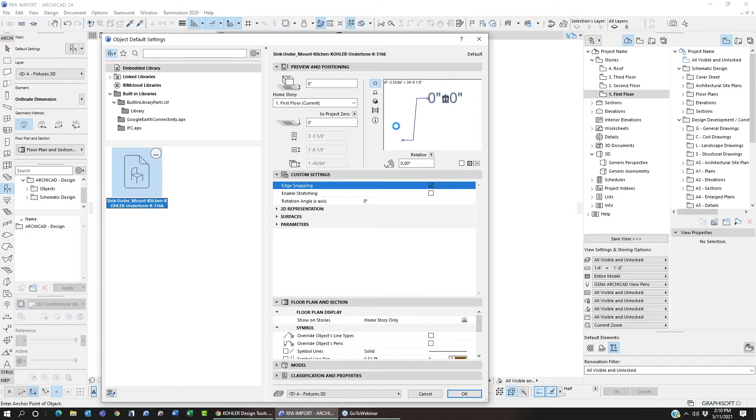And there it is. So it's just said that it's been created and it's been added to the embedded library. I'll hit OK on that. Go to the object, double click on this, and you'll see here under embedded library that that part has been put into the library there, and it's got quite a few polygons here, but I'll just show it in 3D.

That's it. And it's got some information in here as well, some parameters that come through with it. We can kind of use this, and it has a few other settings in here which we can turn on or off, edge snapping, stretching, things like that. But I'll just hit OK, and I'll place it in here. And it'll come in.

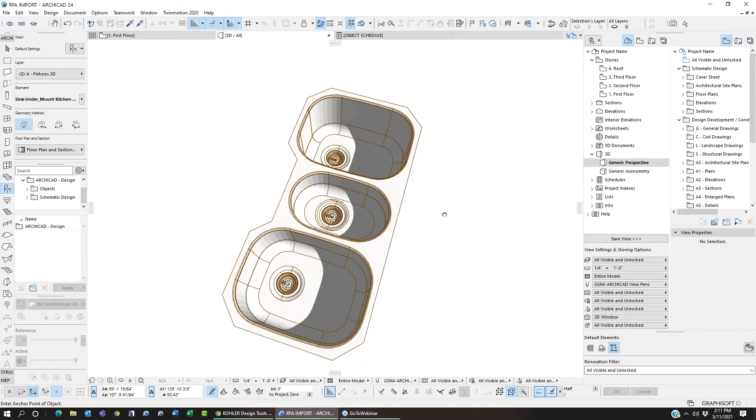There it is. Yeah, so if we just take a look at this in 3D, show all in 3D. You can see there that this was just the medium quality, so it's not completely... it's a little segmented, but I think you'll find that it will still render quite nicely.

I'll just render it quickly here. Render. So it'll show up pretty well here in a full render. The curves, the segments, are pretty unnoticeable, and the quality is really pretty good.

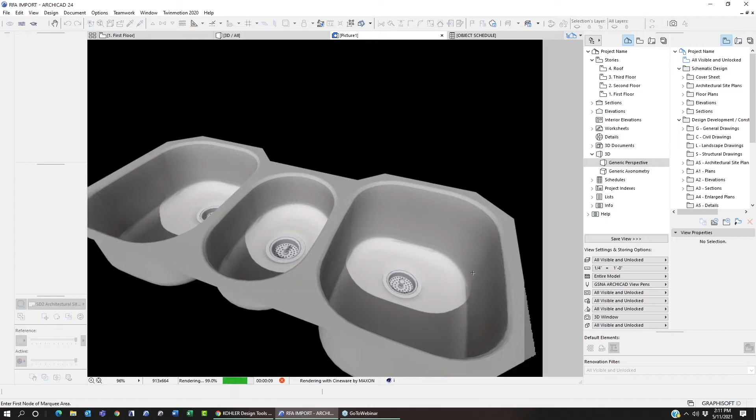And also I've got a schedule here, and this just will list out some of that information, those parameters that were available for listing. So you can pull this information out into either a schedule or into labels. So all that comes through as well. So that's as easy as it is.

You just got to make sure that these RFA objects are not too old. I think we can go back as far as like 2011 up to 2020, I believe, is the latest one that we have. So if you're having trouble with it, it's probably because it's a really old RFA object. But if it's reasonably new, then it should work just fine.

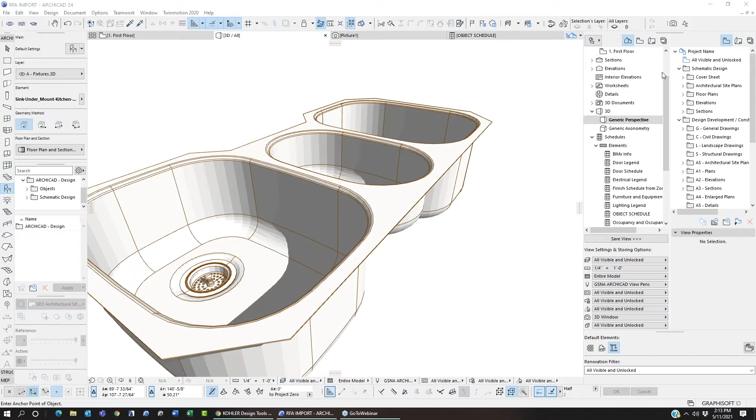Tom, I just switched over to you. Let me know if you're all set. I've got it, thank you very much. Perfect, so let me just go ahead. You can't hear me? Can anybody hear me? We can hear you. Okay, so everybody can hear me. All right, thank you. Okay, so let me go ahead and show—sorry about this, guys, looks like it's showing on the wrong screen. So I'll go to the main screen.

Okay, let me just go ahead and take you through this. My name is Tom Simmons, I'm with ArchVista, and I'm going to take you through Modelport. Modelport is an application that we developed with some developers, and I'm going to take you through how it expands some of the import options, offers interactive preview, cleanup graphics, edit import objects, and improves performance.

So let's first start about expanding the import options. Many of you talked about bringing in SketchUp files, Revit files. There's a lot of file formats out there, and one of the reasons why this was developed was that a lot of people want to bring in additional objects beyond SketchUp and Revit, and also be able to manage those objects in terms of graphics, performance for polygon counts, file size, etc.

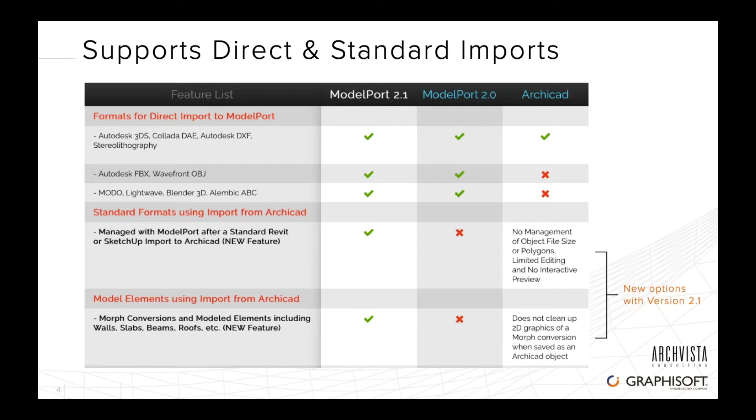So we developed it for that purpose, and we just recently added, as was released just the last couple of weeks, additional formats so that we can now import formats like: you bring in a Revit object or SketchUp object through the standard method you would in Archicad, and now you can bring that into Modelport to use the editing features and management features there. You can also likewise bring in morphs and other things that I'll talk about in a second. Let's talk about the direct import first, okay?

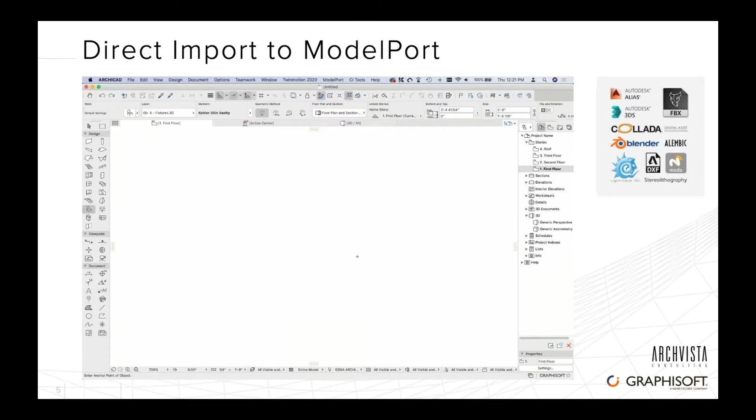If we're going to use Modelport to import, let's say, a 3D model using the DAE format—now the DAE format, if you're not familiar with it, is a standard format in the SketchUp 3D warehouse. So you can either download SketchUp formats or the DAE, it's a Collada DAE format. You can see it brings it in pretty cleanly using Modelport in that format. But if we use the standard SketchUp format from the 3D warehouse, it's going to come in, and this is going to look very typical of what you would probably see with any object you're bringing in from SketchUp or any other format that has curves to it.

And that's that you're going to see this sort of triangulation in the object, both in 2D and 3D, and it can get really messy. And that's part of what we tried to do with Archicad with Modelport, is to try to clean up some of those graphics.

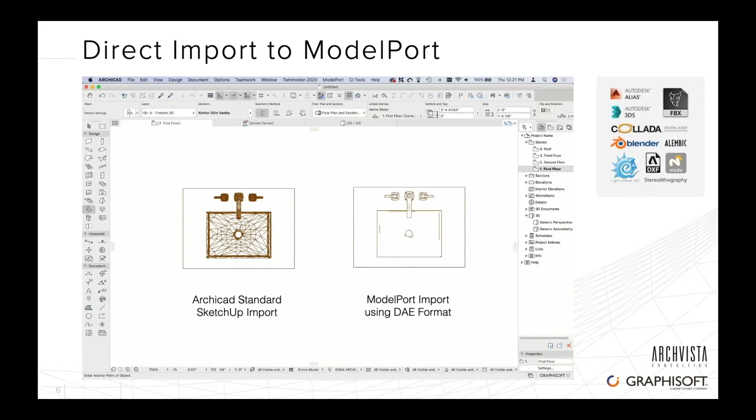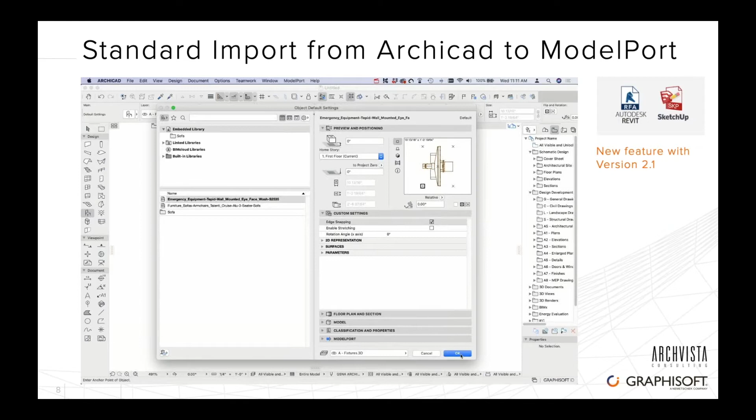We also recently allowed you to be able to import an RFA or a SketchUp file using the standard Archicad process. Now, why would you want to do that? Well, first off, let's say you have a Revit object, and it comes in, and it's great, brings in all the stuff, except that there's something wrong with it. Perhaps it's rotated in the wrong direction, perhaps there was something—people leave things on that you can't turn off, various reasons why.

And so you could explode that into a morph and edit it like that. Or with Archicad, with Modelport now, you can also just import it directly into Modelport and begin to use Modelport's feature set to change, in this case, its rotation. But you could also use it for editing the graphics, as I'm going to show you in a second, and some other options as well.

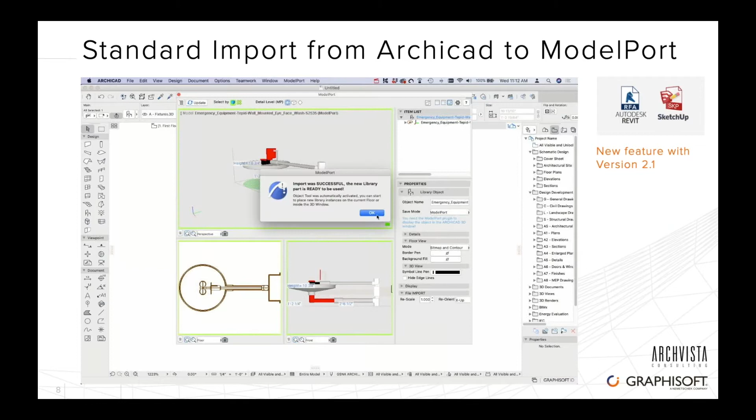So here we've imported it to Modelport, and we'll just basically delete that Revit one that we brought in, and place the one now in Modelport. There you go.

So let me now flip into talking a little bit about the management and editing capabilities of Modelport and why this is important. So many times when you bring in objects, and they can be from various sources, the ones that we mentioned in the poll and many others out there, you'll have objects that have high polygon counts and are large files. This is a great example.

This is the Viking website. This is their option to download a Viking object, and these are massive files that were created, as far as I can tell, from Rhino, and then ported out of Rhino into various formats for SketchUp, Revit, 3ds Max, etc. When you try to bring them into Archicad, they're huge. This is a 177,000 polygon oven, 45 megabyte oven, and this is one of the smaller files. Some of them were just really difficult to handle.

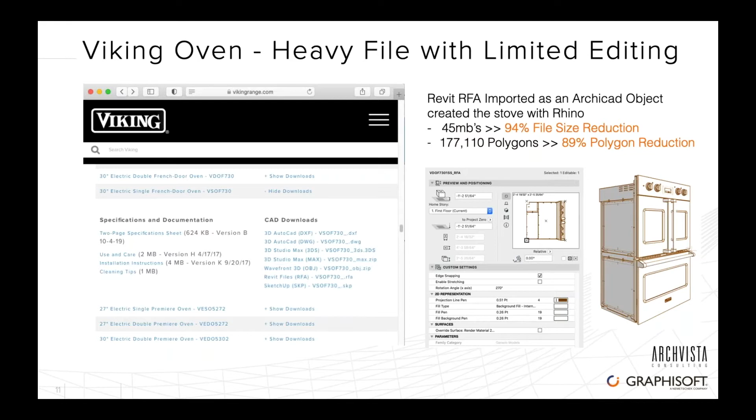So what can you do with that? Well, that's what I'm going to show you. You can actually use Modelport to reduce the file size and reduce the polygon count. I'm going to talk about this process. So let's take a first look at what you could do.

You could bring an object like this in and convert it to a morph. You know that when you convert it to a morph, sometimes it will have a massive amount of information also, because the morph becomes, as this warning is telling us, it can increase or decrease the performance of your project. So here's how you can handle that.

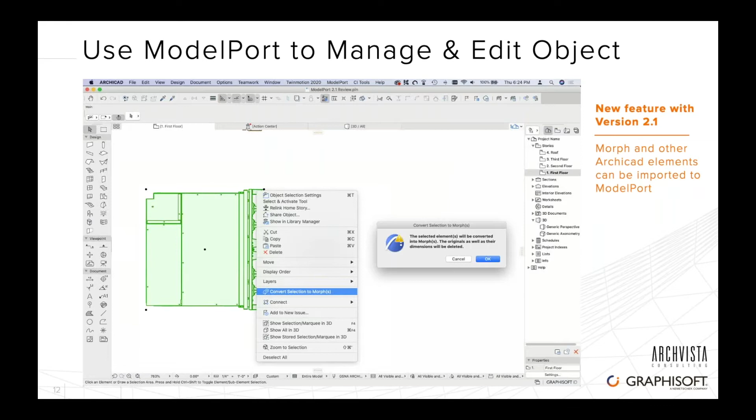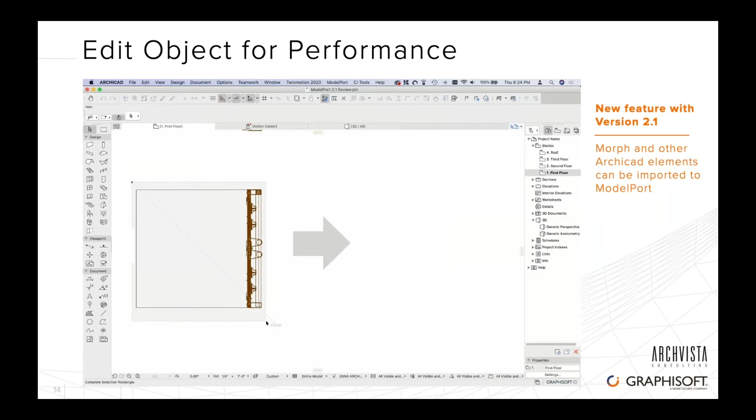This is a good example. We brought this in and converted it to a morph. So to help start simplifying and increasing the performance of this object, I'm going to decrease the back side of it. I don't need that, so I'm just going to delete that. I'm going to draw a slab as a representation for the back part of that oven. Just by doing that, I've already decreased this by about 60 to 65% in size.

I'm going to import that now into Modelport, and you're going to see once it comes in that rather than being 177,000 polygons, it is now 58,000 polygons.

So, good first step. Next thing we're going to do is this object, when it came in from Revit and from Viking, really didn't have any colors to it. So we're going to start adding colors, start adding materials, start to add some graphics to this and edit the graphics as well. And then we can zoom in.

This is an interactive preview, so we can click on any surfaces, any elements in here, and begin to edit those. So here we're going to actually go ahead and change these handles to a darker metal, maybe black. And again, start to build this up, right?

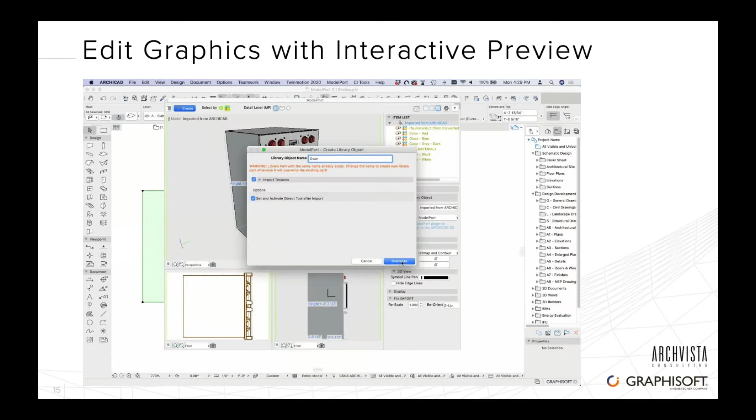So now I'm going to go ahead and create this object. I've taken this morph, a Revit object, converted it to a morph, and now I'm going to make it into a Modelport object from this point forward. Once this is done and this object has been created, I can close this and go back to Archicad.

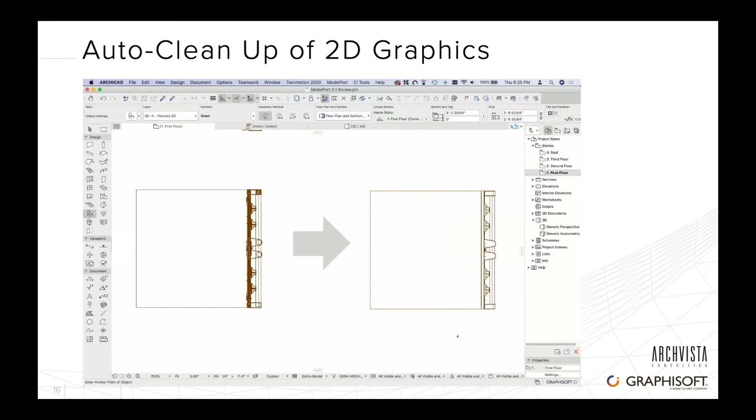And now at this point, we're going to go and place the object, and notice how much it's cleaned up too. After taking that morph, bringing it into Modelport, just like we did earlier with the SketchUp object using the DAE format, it's cleaned up the graphics in 2D and 3D. So next we want to reduce the polygon count.

Another new feature that's been added, because we can now bring in morphs and other elements, is we can select all the meshes at once versus having to select each individual one. So if I want to reduce the polygon count, I select all meshes, then deselect some surfaces by holding down Shift, so when we reduce polygon count it doesn't create triangulation on those surfaces. I'll select poly reduce under the detail full panel.

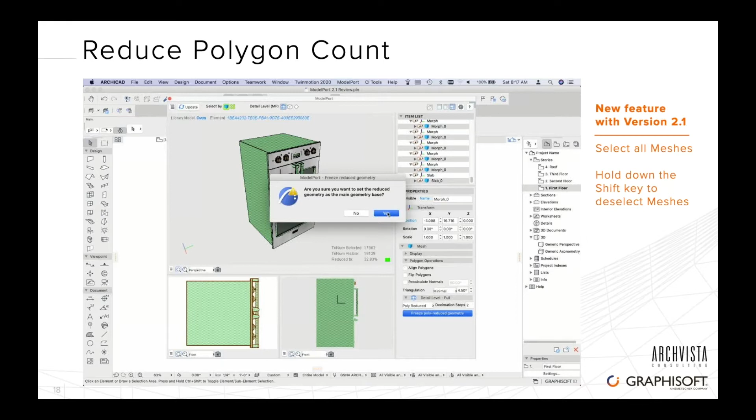Then I'll change the decimation steps. You can see this has reduced it down to 19,000 polygons from 177,000 - a huge difference. I can take it further down to 14, but I don't need to go that far - you start to see some triangulation there, so I'll take it back up to 2, the default. Then I'll freeze the poly reduce, updating this object, and finally update the object itself, and we're ready to go.

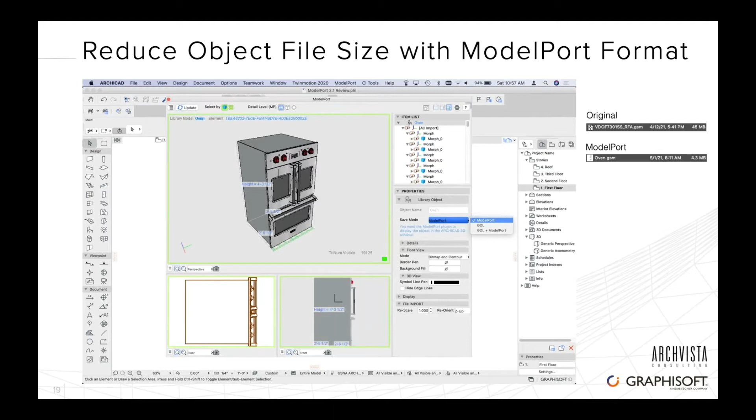Next, I also want to reduce the file size. This is a pretty big object - as a single object it was 45 megabytes. When it comes into ModelPort, we have the option to set the save mode to ModelPort versus the default GDL format. Just by doing that, we're reducing it from that 45 megabytes down to 4.3 megabytes in the final file. Huge difference between the two.

We can also control line weights, colors, and fill backgrounds with these objects when we bring them in. When I brought this morph in originally, it's in true line weight mode right now. But when we go into ModelPort, we can change our preview to show the plan view on top, and now I can select the areas I want to change.

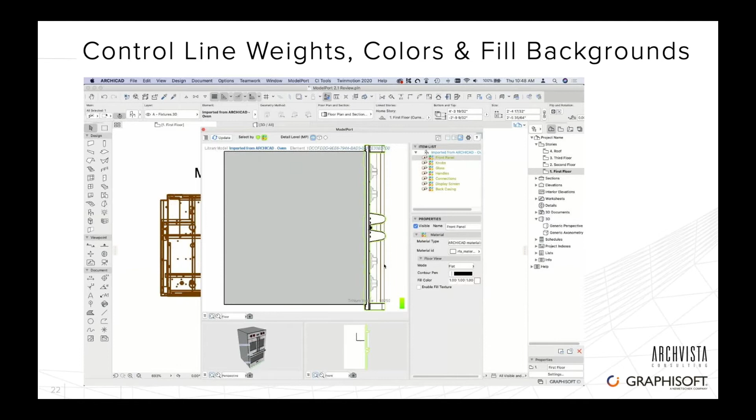Maybe I want to change the casing in the back to have some gray fill background. Maybe I want the line weight of the stoves to have a heavier edge around that casing and areas up top that are closer to you. Maybe I want to gray out some of the areas below so those fade away. I have control over the different materials that are part of this, and by updating this now, I'll see a gradation of the different line weights within this object, giving a much better look and feel.

So the final result here gives more options for importing different objects. With this ability to bring in morphs, add additional slabs to replace things, improve performance, and even alter those objects, I can take something like this and reduce it 94% in file size, 89% in polygons, clean up the 2D and 3D, edit the object, pen customization, material texture editing, etc. So you can see the results.

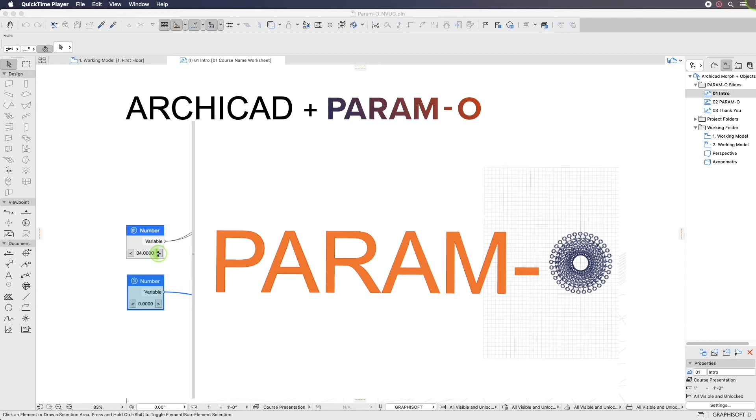PARAM-O is amazing. It's now built into Archicad and it's fun. But you may be wondering, what is it? Well, it's a new way of creating parametric objects in Archicad without coding or scripting. Grasshopper fans will be at home with the graphical interface. Here are 6 important aspects of PARAM-O that make it easy and accessible - number 1 being it's built in for both Windows and Mac users.

Now let's put PARAM-O into action. Here's the example kitchen layout we'll populate with PARAM-O objects. We'll open our new island object. Check out the PARAM-O icon. Here are some toggle display parameters created by PARAM-O. Now we'll place the island object and adjust some size parameters.

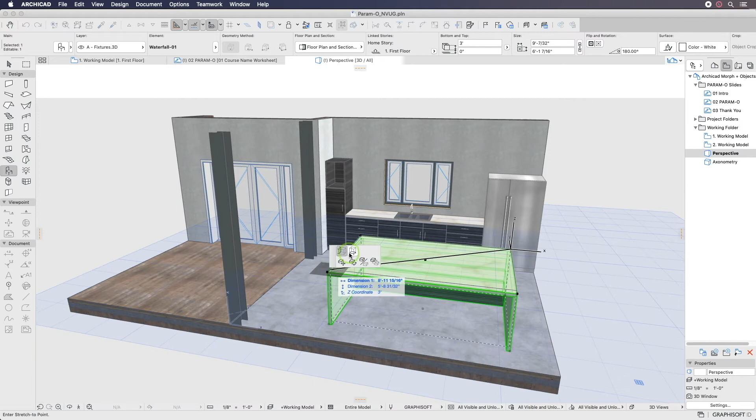Just like the standard objects, you can apply favorites to the PARAM-O objects. We'll move this island to align with the existing kitchen counter and make a quick adjustment to the counter thickness.

Now let's open up the PARAM-O Manager and edit this object. In the PARAM-O Manager dialog, you'll see an active list of the objects available to edit, rename, and delete.

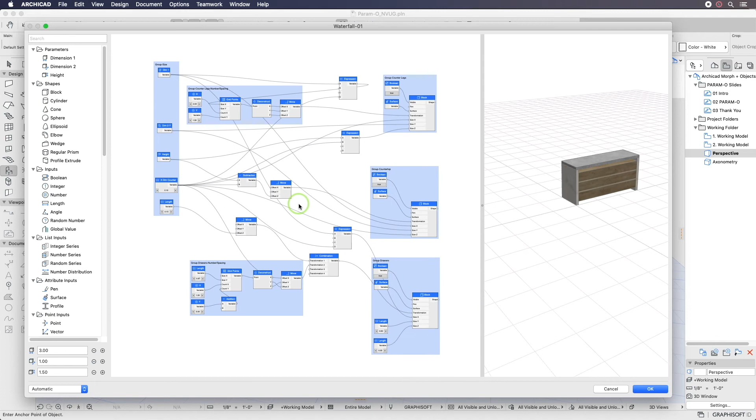Now in the PARAM-O Editor, you'll see 3 columns: the list of commands and inputs, the node diagram, and the 3D preview. By the way, the 3D preview toggles to the automatic script generator, not that you'll ever need it.

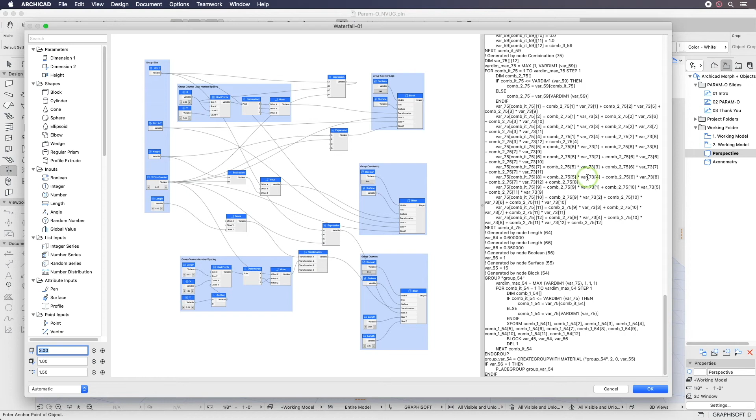The node diagram can look like a spaghetti mess, but we're going to start a new object to show you how it's done. The block is the best item to begin testing.

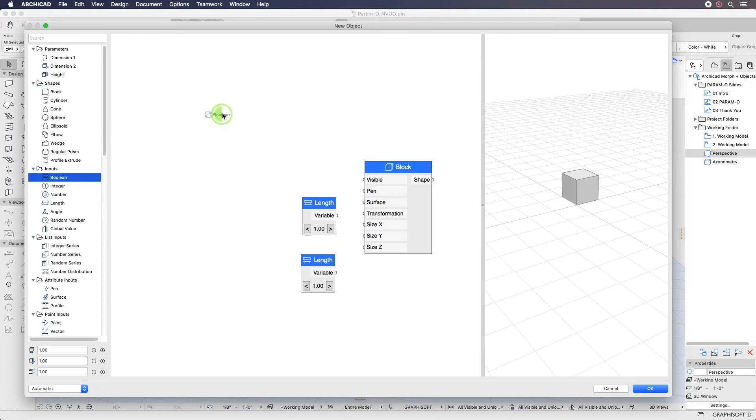We can control its size by adding some length parameters. Then a boolean to turn it on and off, and a surface material, which we'll attach to the block with a connecting spline.

Lastly, we'll test out the length parameters.

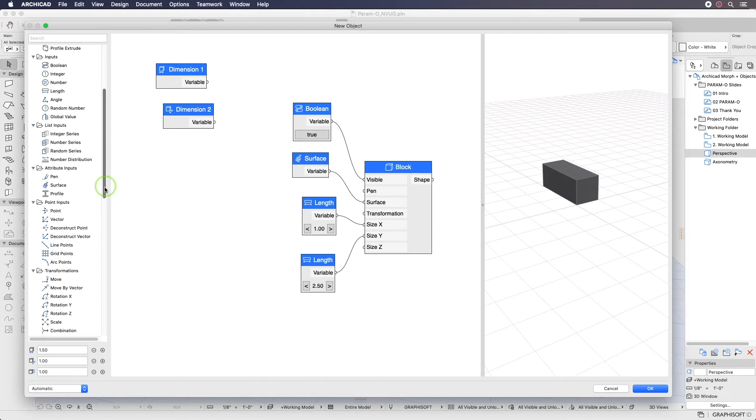Here's where we add a few dimensions to control the movement or location of the block and add a height parameter. And a quick test.

PARAM-O's power comes from how it can work for you. We're going to multiply this block in a matrix grid and control the repetition sequence.

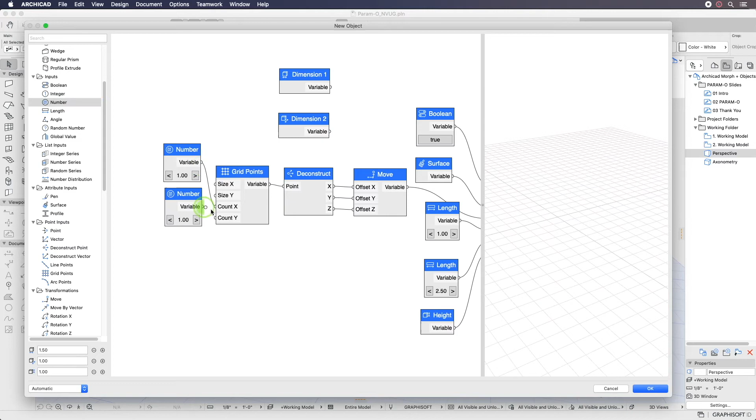You can double-click on the nodes to change the settings. In this case, I'm adjusting the step to be by 1 instead of half.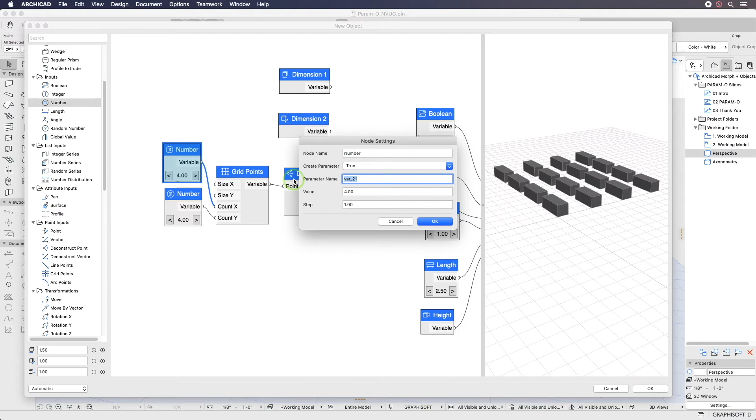I forgot to mention in the node settings, if you set the create parameter setting to true, it will then be displayed in the object selection settings. Of course, you can customize the parameter name to whatever you like.

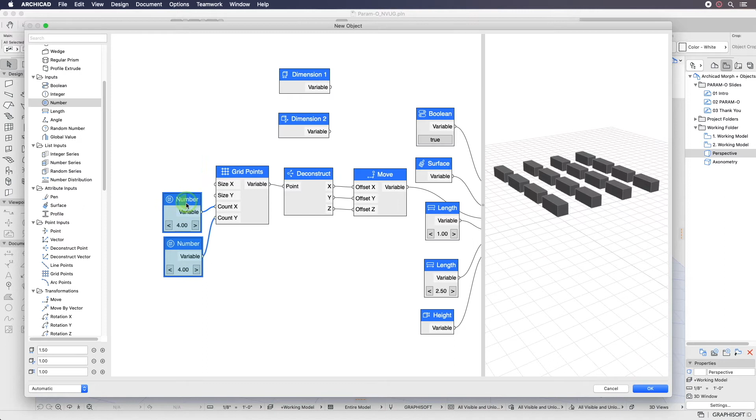Let's do a little bit of organizing, change the grid size, and adjust the block placement.

To continue organizing, you can select a bunch of nodes, group them together, and customize the name of the group.

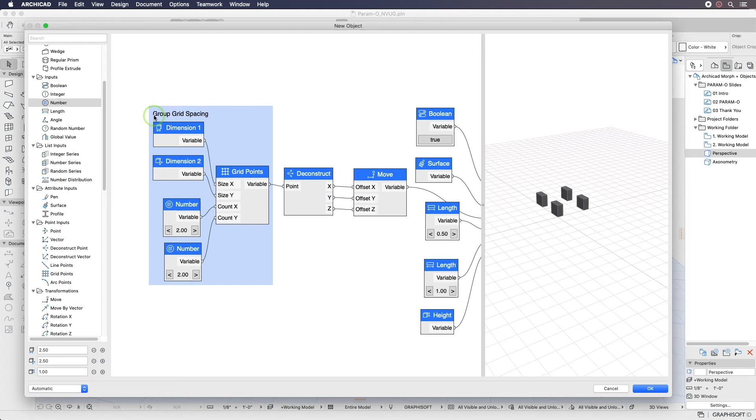I think we're ready to save this object and test it in the model. The new object will be displayed in the PARAM-O Manager and eventually be saved in the embedded library.

The new object gets placed, but we probably don't need a bunch of stray blocks in our model, but some stools at the island would be useful. Let's open the object in PARAM-O and edit it.

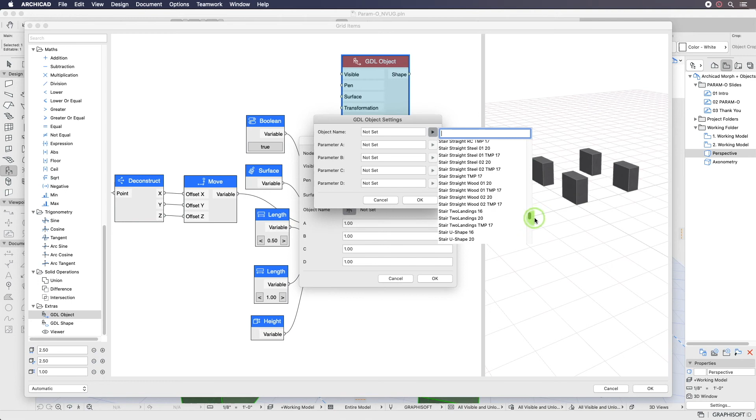What we can do is swap out the block item for an existing object in our loaded libraries. I'll take advantage of the boolean command to turn off the block item and then add a new spline to the GDL object of the stool.

The stool spacing is way too far apart, but we can easily adjust that in the object selection settings. While we're in there, we can make adjustments to the spacing and the number of rows.

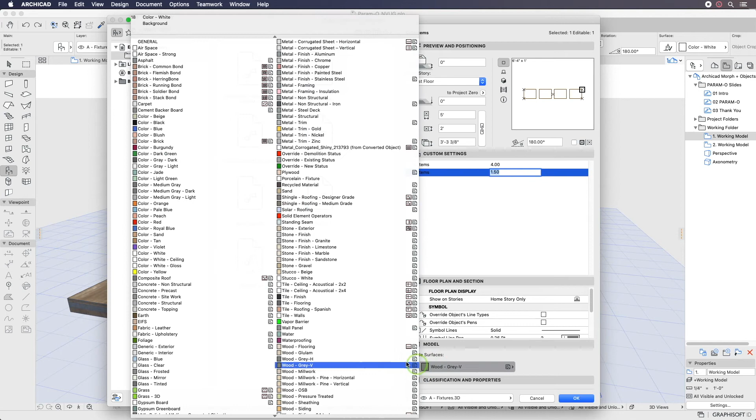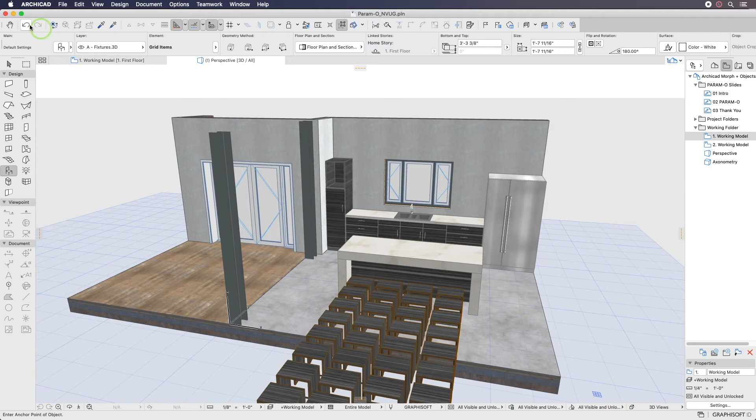With a bit more adjustment, these 4 stools could become 400 chairs, bleachers, or an auditorium full of seats. They could be elevated, rotated, or distributed along an arc. PARAM-O fully shows its power when it easily automates the repetitive features in design schemes.

I'm going to show you another object that builds on that mindset. Here we have a series of panel slats that follow a sine curve.

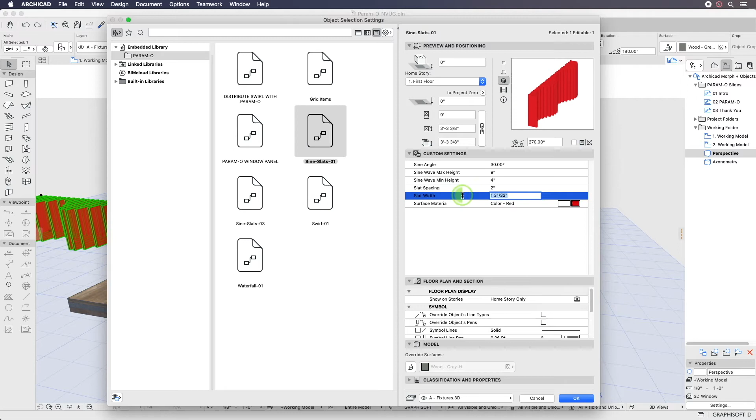Here we can edit the PARAM-O created parameters. The manual entry of data works just fine, but it's not quite as smooth as a dedicated editor.

Once we open the object in the PARAM-O editor, modifying things in the node diagram is smooth and provides great visual feedback. Watch how that sine curve undulates.

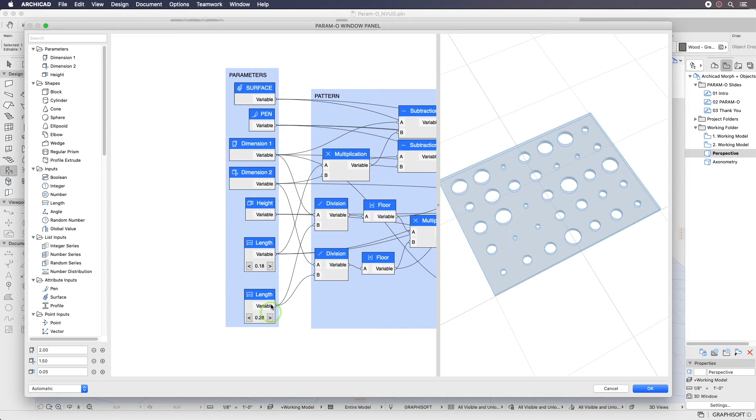Let's add another PARAM-O object to create a custom countertop. Here we can edit different aspects of the circle pattern.

To take a quick tangent, in Grasshopper we can control object parameters in much the same way as we're doing here in PARAM-O. The combination of Rhino, Grasshopper, and Archicad gives you endless creative possibilities.

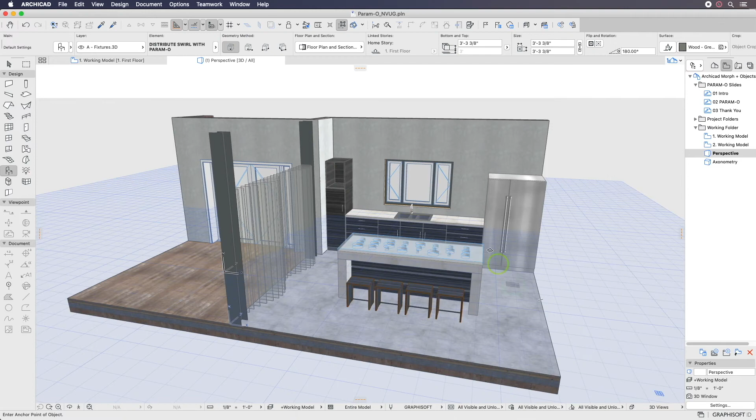Okay, so I thought we needed a nice geometrically abstract light fixture to go in this kitchen. I was experimenting with curves and arcs and having simple shapes rotate progressively around them.

Now I didn't try to match this example fixture very closely, but I did find the gentle sweeping curves and the repetitive elements a nice challenge for PARAM-O.

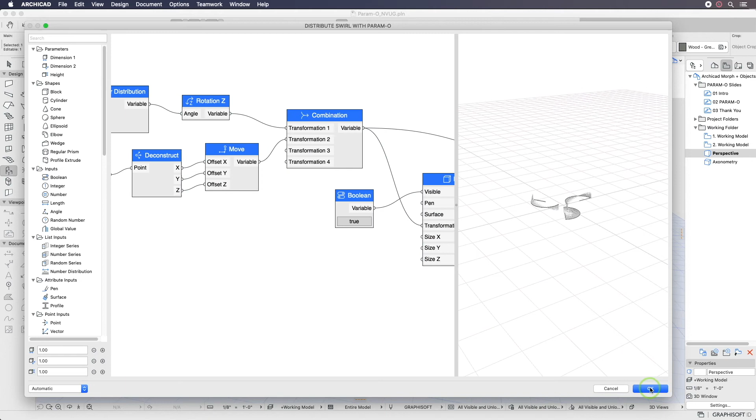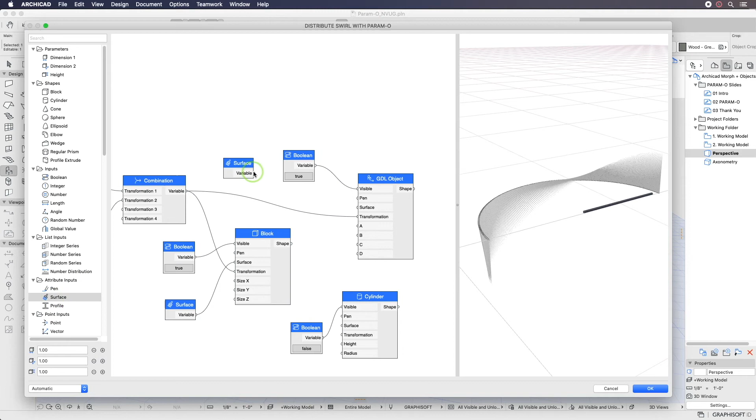As you look at just a single blade of this fixture, you'll see that it's made up of hundreds of tiny little arcs, actually 180 of them, each one rotating 1 degree as it goes from straight up vertical to straight down.

We'll change the number of blades back to 8 for the kitchen. The embedded library will get updated and the kitchen light fixture will be modified to show the latest surface material changes.

That concludes my 10-minute introduction to PARAM-O. I hope it sparks some interest in a fantastic new way to make custom objects.

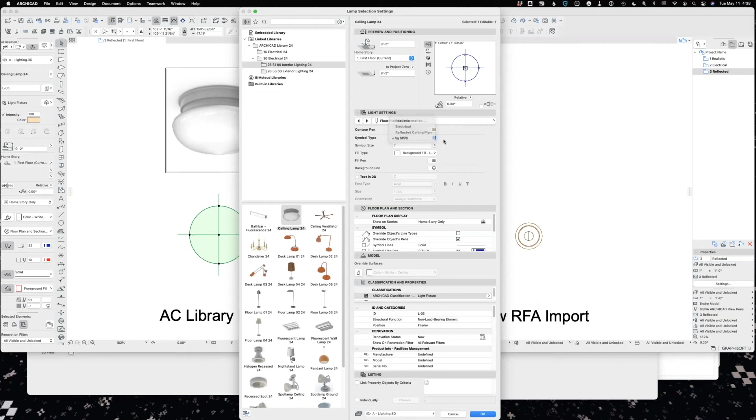And then best of all, you can hook that choice to model view options, so all of your fixtures will use the same setting and all of the symbols will be in sync all the time. That's a strong feature and I recommend you do that. But it's nice when you start creating your own stuff if it can also cooperate with those settings so that all your symbols are consistent, whether you're dealing with Archicad stuff or stuff you've gotten from somewhere.

So first example, here's the previous time. Imagine that I did this. I made a lamp and I've got settings in there. They're not the full UI because that's too complicated for me to do, but you can see I've also got that MVO option and then the other literal symbol options that I've added to a model that I made myself.

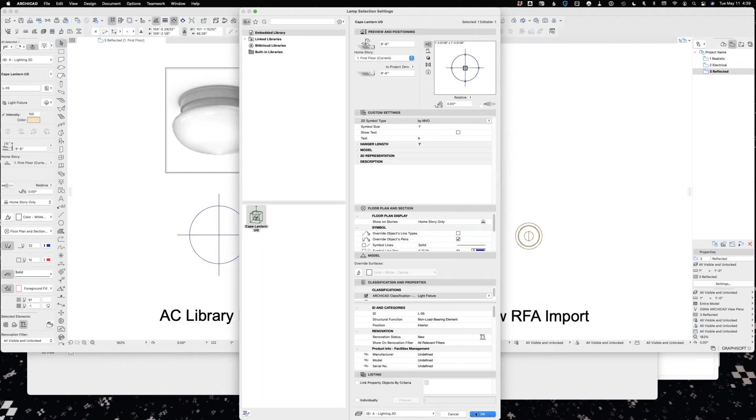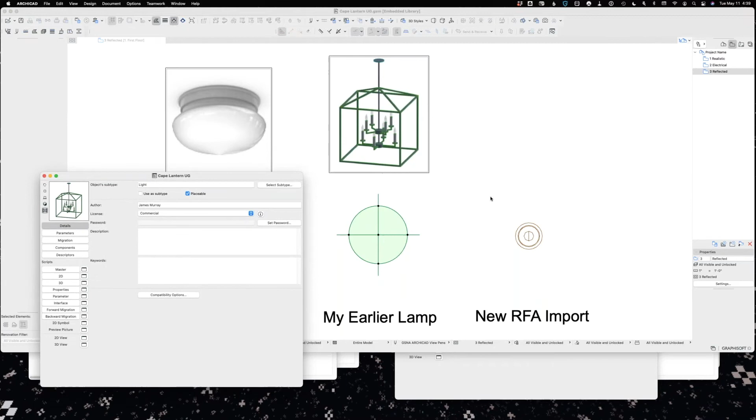All right, so I'll show you how to add those parameters and the little bit of script that you need to make that work for anything that you might import. The first thing we got to do is open the object, that's File, Libraries and Objects, Open Object, and that'll take you to the object editor. I'll also open what I've got over here, a new object that I imported using the RFA importer, so I'm going to open that as well on the right.

The first thing I like to do is, all RFAs, they cannot come in as lamps, they can only come in as objects. If you want it to behave like a lamp and be available under the lamp tool, which I like, you have to change the subtype. So go to select subtype, unfold a little bit under model element, and then under electrical element you'll see light, and that is the subtype for a lamp, so it'll now respond to the lamp tool.

All right, and then the other thing we need to do, second button here in the sidebar, we'll go to the parameters and we're going to make some parameters. I'm going to put these new parameters underneath 2D representation here in the parameter list. The parameters are the things that are available to the user when they go to the settings dialog, so these are the things that you set in the settings. In order to make a new one, you hit new.

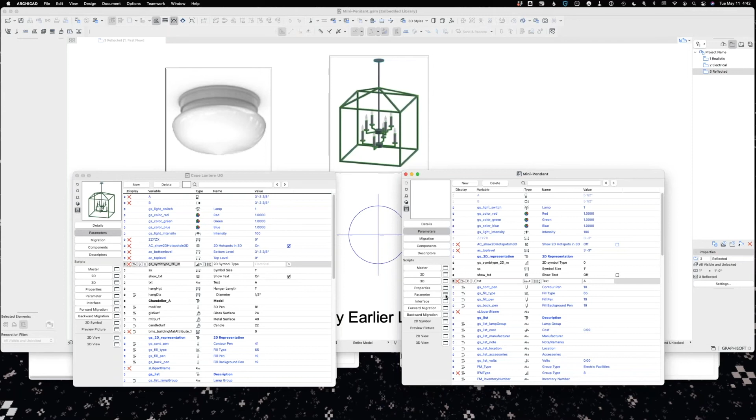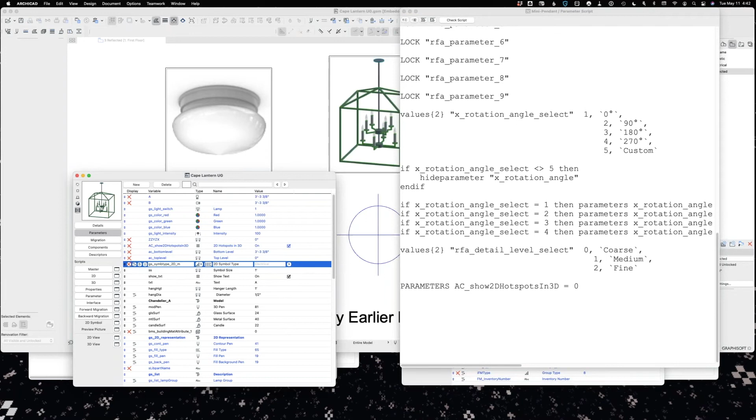This is terrifying looking auto-generated stuff that the RFA importer made. I'm going to scroll all the way to the bottom and ignore all of that, and come over to my previous lamp, open its parameter script, and I've got this little block right here which starts with the word values, and two.

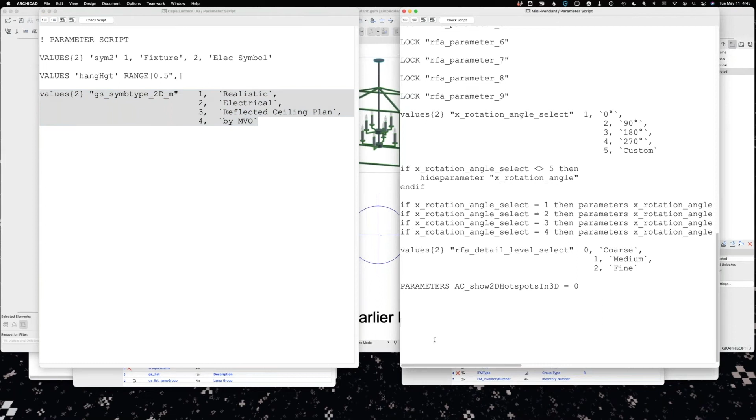This parameter is one of the parameters we created, and this code is going to say add this list to that parameter. So I'm just going to copy that and paste it into the parameter script at the bottom.

If I come back out to editor headquarters here, you'll see that now this parameter has got those four options. I'm going to choose it to default to MVO because I think that's the best way. However you save this, that's going to be the default the user sees when they start using it.

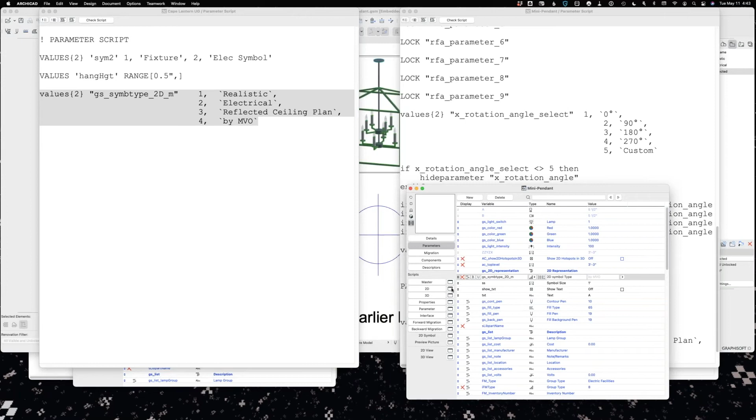The second script we need to deal with is the 2D script. The 2D script is responsible for what the object looks like in plan. Again, this is auto-generated stuff, and I'm going to just select all of that and get rid of it.

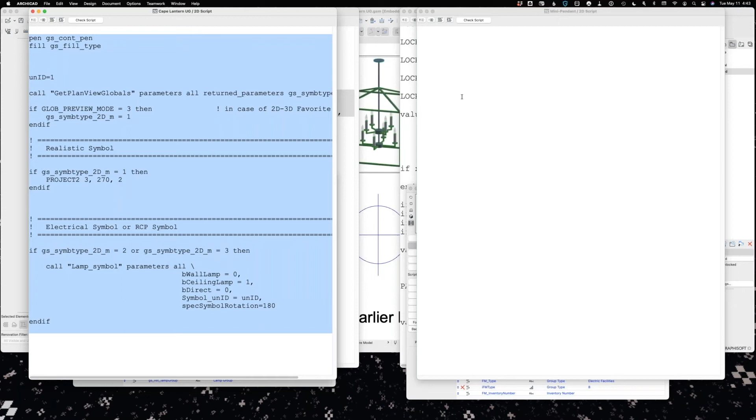Back to my previous lamp, I'm just going to select all this, copy, and paste it. So very briefly, without getting into a lot of technical detail, basically this script - you'll see the word 'if' every now and then.

What that means is, depending on what that symbol type parameter - what the user chooses - it's going to do different things. If you choose to show it realistically, it's going to use this little line here called Project 2, which just means take a picture of the model.

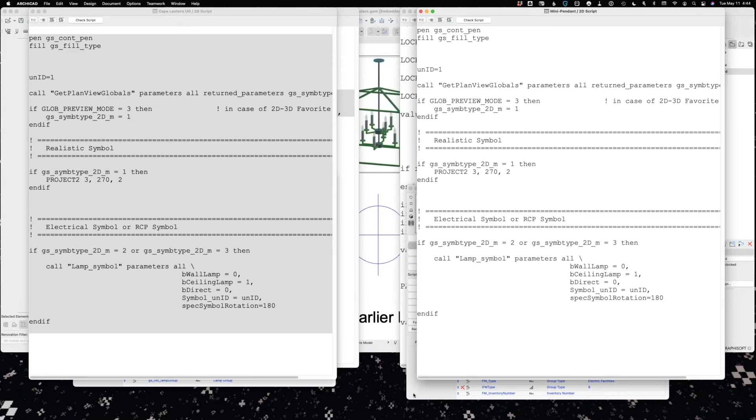If down here you're using any other setting, it's going to essentially call another hidden object in the library and instruct it to draw the right kind of symbol for you. So then if we come back out and look at 2D view, we can see that if we choose to look at it differently, the symbol will change.

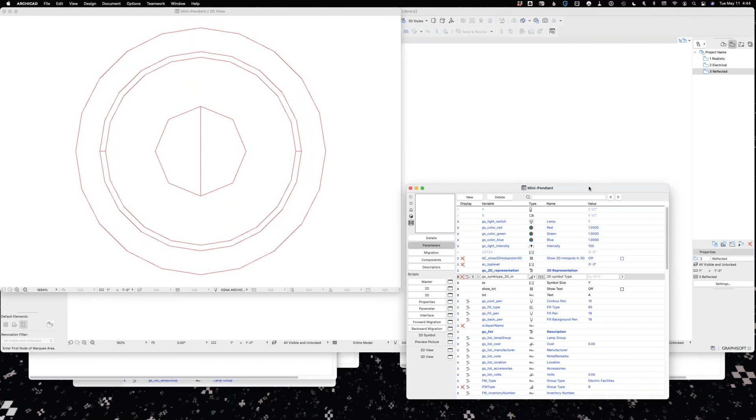And again, I want to leave that on MVO. All right, and then I'm going to save this real quick.

And then I will go back to the plan and I'll get my lamp tool. Whenever you save an object, it'll always be the default for whatever the tool is. And so there's my new lamp.

I've got a few views saved over here, so I've got that MVO setting hooked up to views. I can easily click these and switch between the different symbols. You can see that Archicad library, old object, new object - they're all speaking the same symbol language.

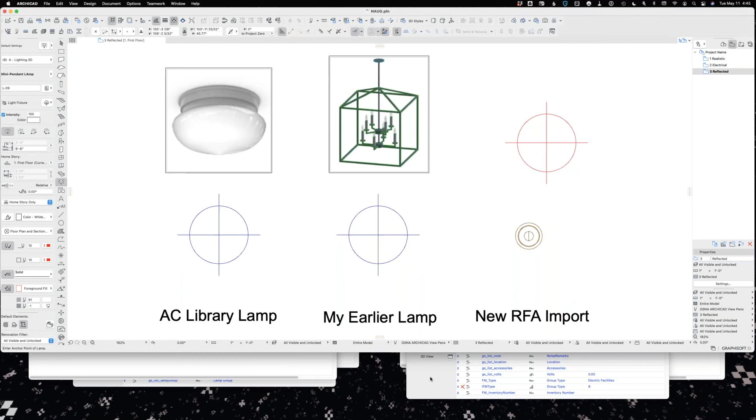Catherine, if I have one or two more minutes, I can show one or two more little things. Yes, please - there is actually a question about it, so go ahead.

One other thing I want to show you is the 3D script. Actually, first let's look at the 3D view of the object, down here. I'm not sure why, but this guy imported upside down - that should be a pendant, and I don't know what you call it when a pendant is standing up. But that's easy to fix.

If I go to the 3D script - the 3D script makes the model. Again, this is all auto-generated stuff from the importer, and we're going to ignore all of it. I'm going to go all the way to the top, hit enter a few times, and then type MULZ -1. That command simply makes the whole object mirror itself along the Z axis.

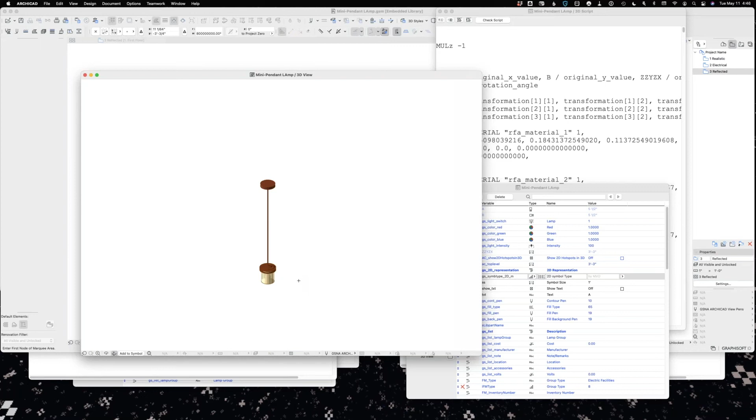So then if I go back to 3D, we've now got the pendant fixed. If that ever happens to you - for some reason it imports upside down - that's a really easy fix to make with a very, very small amount of typing.

One more thing that's nice to do when your library is starting to get bigger is create a preview picture that users can see when they're browsing the library. That's this button right here on the sidebar.

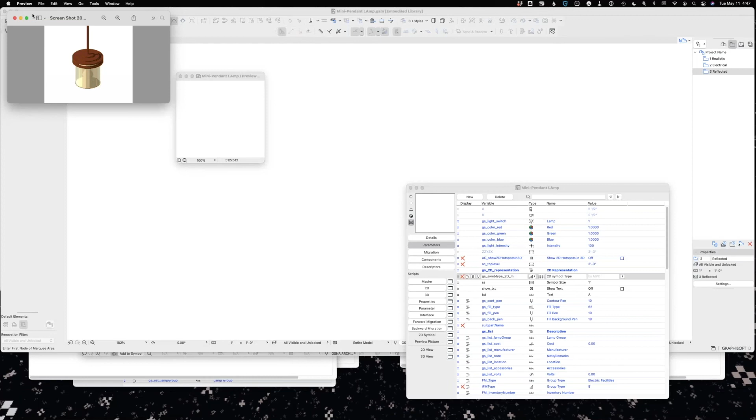It's empty right now, but I've got a screenshot saved here of my lamp, and I'm just going to select all that, copy it, and then paste it into the preview. Now you can tell what you're looking at when you're choosing it in the libraries.

So that's what I've got for you, unless there's a question or something. Hope it's helpful.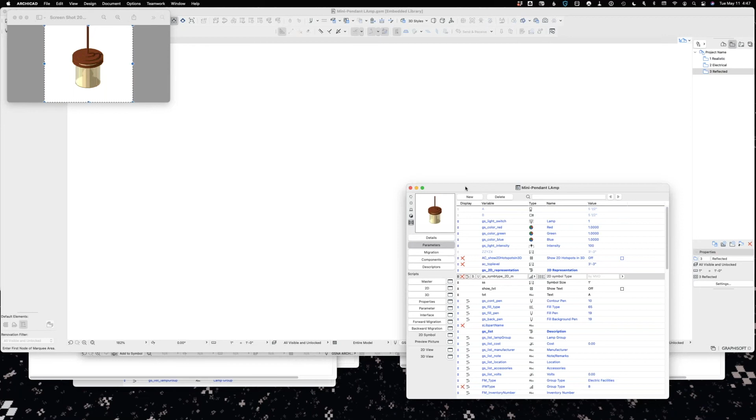I got a wow, and linking the MVO setting this way is much easier than scripting MVO. Thanks, James. I already passed this on to Zoli. Zoli, are you ready? Yes, yes.

Let's talk a little bit about metadata. I won't be long, but the webinar today is about bringing in geometry from all these different platforms or creating geometry from scratch inside Archicad. In my opinion, what really makes a product a BIM is obviously the metadata, the non-graphical data, the 'I' in BIM. So I want to show you how that's structured inside Archicad, and I could see while I was screening the questions that there are some questions about this already.

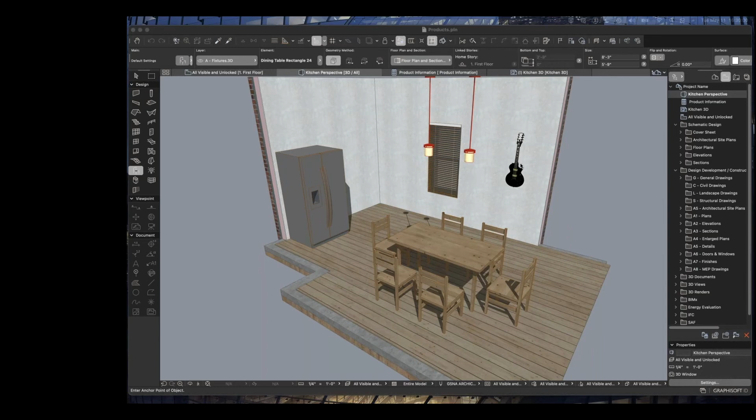So how do we populate that metadata? That could be anything that represents a product, so manufacturer, model number, color, material, sustainability data, and so on. But you can also assign it to a building assembly, like a wall assembly's UL number, or include occupancy data in your zones. So you're not really limited in any way, and I think this is a fantastic feature set inside Archicad out of the box.

I am using this little corner of a kitchen that I like to joke used to be my apartment, my kitchen in my apartment in New York City back 15 years ago, but sad reality, this was my whole apartment. So anyway, if I go into that refrigerator here...

Everything that's metadata is structured around the classification. That's one of the tabs here, let me just expand that a little bit. Out of the box, you will see the Archicad simplified classification master format, but you can bring in any system based on your country or territory that you want to use. As long as you classify your components correctly, they will get the appropriate metadata fields that we call properties. So at the user level, that's really all you need to do.

Now for the BIM manager to set this up, they will have to go to options, and right next to each other there's the property manager and the classification manager. Just to show you the classification manager, when I select, let's say, site massing, and click on one of these items, it will only bring up the appropriate properties, and I can edit that list. Here is where you can bring in OmniClass or any other classification system. You can use multiple classification systems as well, and obviously you can map these onto each other, especially when you're outputting IFCs.

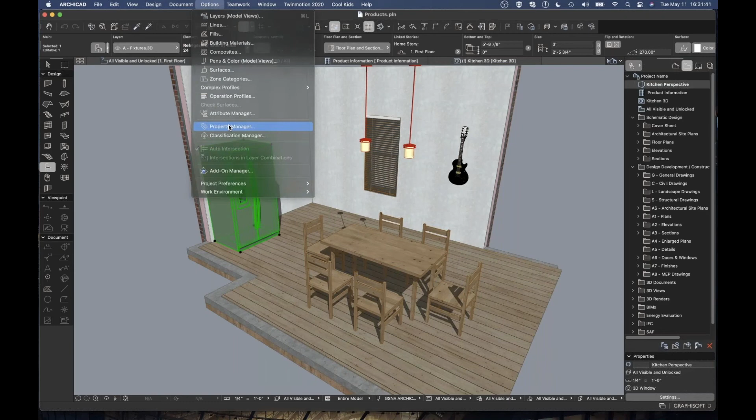The other one is the property manager. That's really the same data, but you're taking the point of view of the properties. So in this case, if I select manufacturer, you will see all of the classification items that manufacturer is available for. A little bit about properties - they're a fantastic feature inside Archicad. They can be all these different types: a string, a number, an integer, different parameters like length, areas, volumes, even an option set where you get a drop-down list of multiple options.

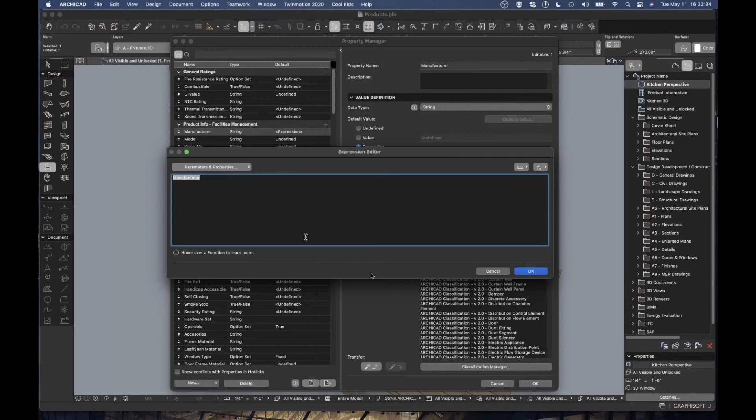The kind of secret superpower here is that you can create expressions. So even if I wanted to map this onto a different type of manufacturer, let's say I have manufacturing in two places, I can just very quickly map it onto that manufacturing. Oops, and I did it twice. From that, you can see that I can combine multiple. So it's a very, very powerful part of Archicad.

Okay, I'm going to discard these changes and show you a better way to populate this metadata. One option would be to go into a schedule, and as we all know, schedules are interactive inside Archicad. So I could literally go and start typing in the manufacturer, the product website, and so on, whatever I want. But we want to open this up to people without Archicad - the specifier, the manufacturer - everybody has Excel. So let me show you how to populate this data from Excel.

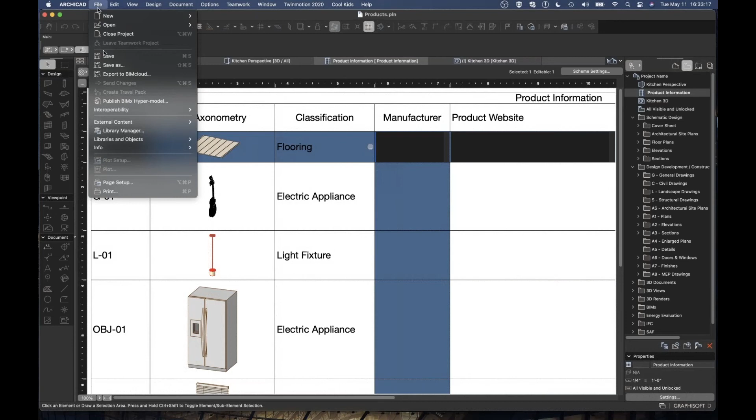You open up your schedule, then go to File, Interoperability, Classification and Properties. We'll have an export property values from schedule, and this will output all this data as an Excel sheet.

So I'm just going to leave the stock name, the out of the box name. This gives me an Excel sheet that has the list, but also there will be one hidden row and one hidden column for the global unique IDs, or GUIDs, that will identify each component and each property, so that our data is always consistent.

Then somebody can go in and type in the specs for those products. Everybody has Excel, everybody can output a CSV file at the minimum. So you could even go to your manufacturer and get the product information as an Excel. Very easy—really opens this part of Archicad up to everybody.

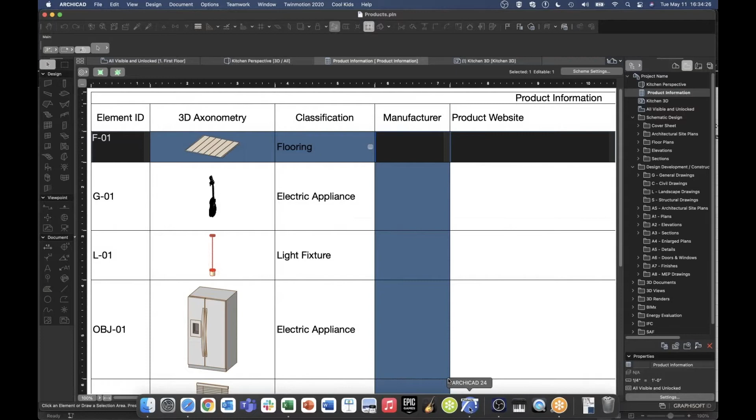So now I actually went ahead and populated this Excel sheet ahead of time so I can show you. I spec this out with the product information. If I want to bring that into Archicad, all I need to do is go to the same place, File, Interoperability, Classification, and import the property values. Now it will bring it up here.

Just want to make sure I select the correct one. If there is a mistake, Archicad will tell you exactly where. When I hit OK, it will start injecting all of that metadata right into the object. Consequently, the schedule will be correct because it picks up the data from the objects, from the elements.

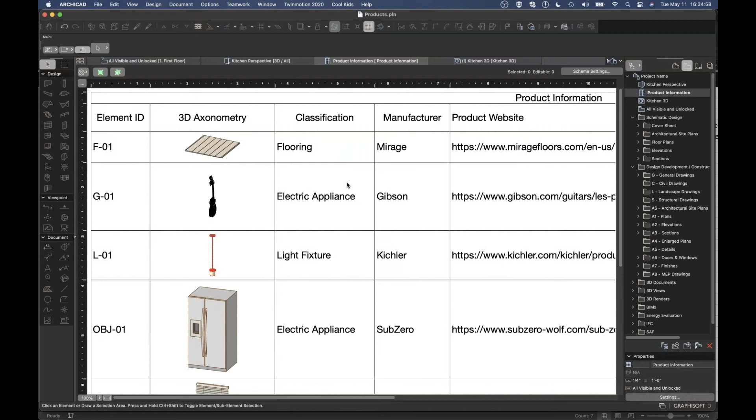And just to go back into this model and show you, it also shows up here when I scroll down to manufacturing all the way—there's my nice little Sub-Zero callout, and then also the manufacturer's website.

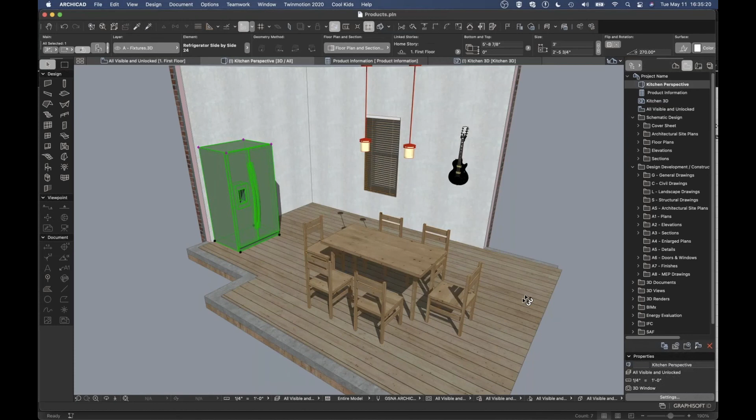So just a couple of use cases for this. This is fantastic, but obviously when you create a vectorial representation, let's say a 3D document, you can also use the auto text label to annotate all of this metadata. And also when you output this into BIMX, that will allow you to embed the metadata in the individual elements, so that when somebody clicks on them, they will have all of that data available to them, and they can go to the website directly from BIMX and so on.

So this is an out of the box feature set to update and populate metadata in bulk in Archicad, and then also open it up to anyone with Excel or through BIMX. Thank you.

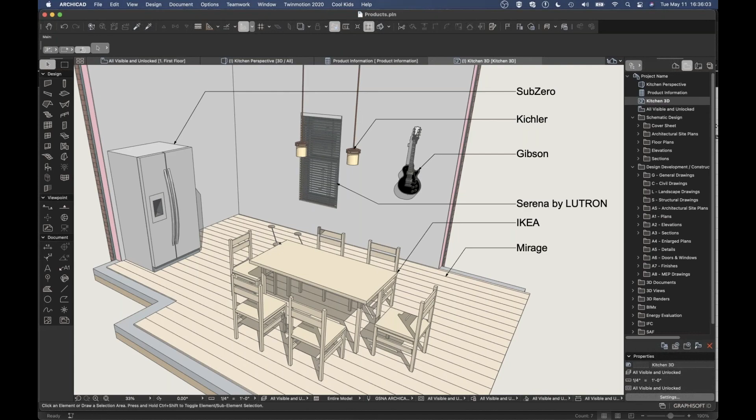Thank you, Zoltan. I know you ran really fast through that—it's a lot of information, but fun stuff. Keep in mind that there are links to that for more information and videos on the handout as well.